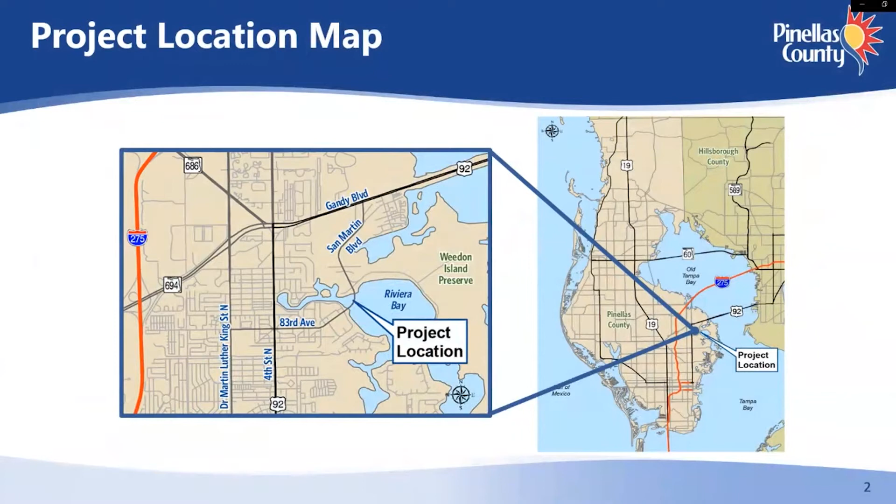The project is located in southeast Pinellas County, just south of Gandy Boulevard and east of 4th Street North. The project is located within the city of St. Petersburg, just west of Weedon Island Preserve. The purpose of this PD&E study is to evaluate alternatives for the rehabilitation or replacement of the San Martin Bridge over Riviera Bay. The project limits extend from Tallahassee Drive to Weedon Drive, a distance of 0.3 miles.

The bridge replacement is included and consistent with the 2045 Forward Pinellas Long Range Transportation Plan. This study has been conducted to meet the requirements of the Federal National Environmental Policy Act, known as NEPA, so that future phases of the project are eligible for federal funding. No build, rehabilitation, and replacement alternatives have been evaluated for the bridge and presented at public meetings held earlier in the study.

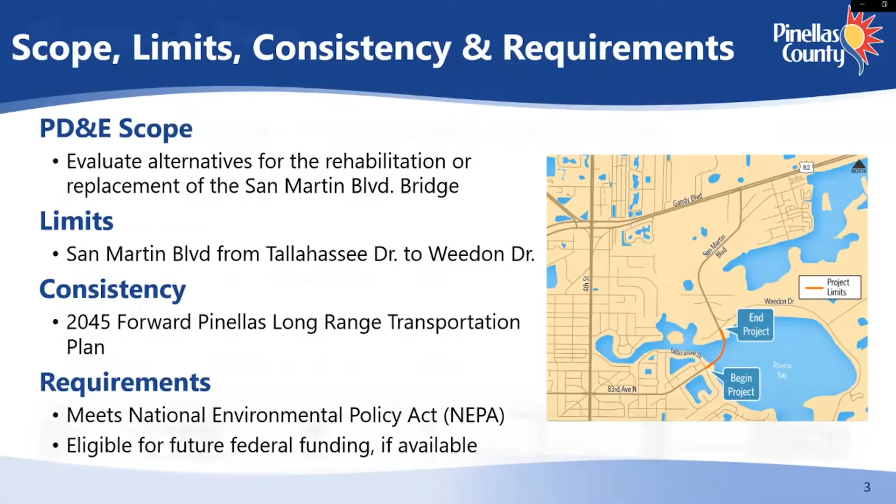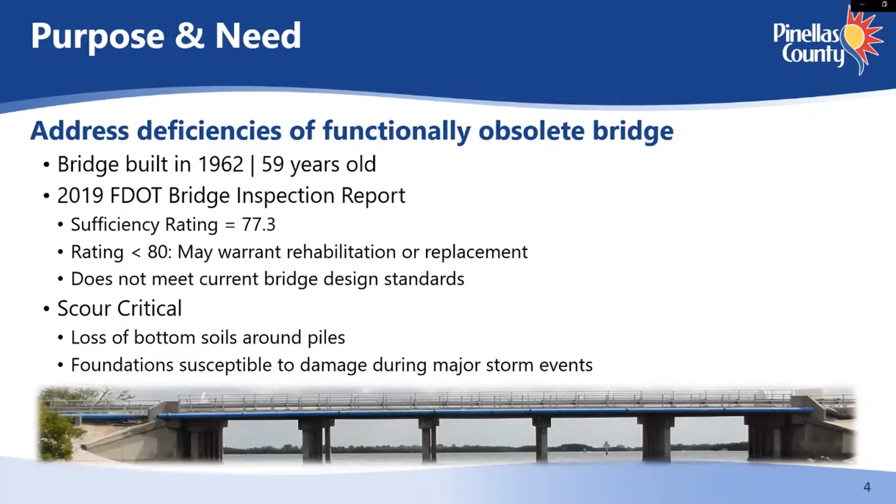The purpose of the study is to address deficiencies of the functionally obsolete bridge that was built in 1962. The 2019 FDOT Bridge Inspection Report resulted in a sufficiency rating of 77.3 on a scale of 1 to 100, with 100 meaning excellent condition. Any rating below 80 may warrant rehabilitation or replacement. A 1994 FDOT scour evaluation classified the bridge as critical and susceptible to damage during a major storm event.

San Martin Boulevard provides a link for residents in the surrounding area to access Gandy Boulevard and 4th Street North. The existing San Martin Bridge crosses Riviera Bay, an inland waterway with a direct channel to Tampa Bay. In addition to providing vehicular access to several neighborhoods from Gandy Boulevard, the bridge marks the boat access point to a series of canals that connect Riviera Bay to the 1,400-plus homes in these neighborhoods. Also, San Martin Boulevard provides a link for motorists, bicyclists, and pedestrians to access the Weedon Island Preserve, a 3,200-acre nature area located just east of the bridge.

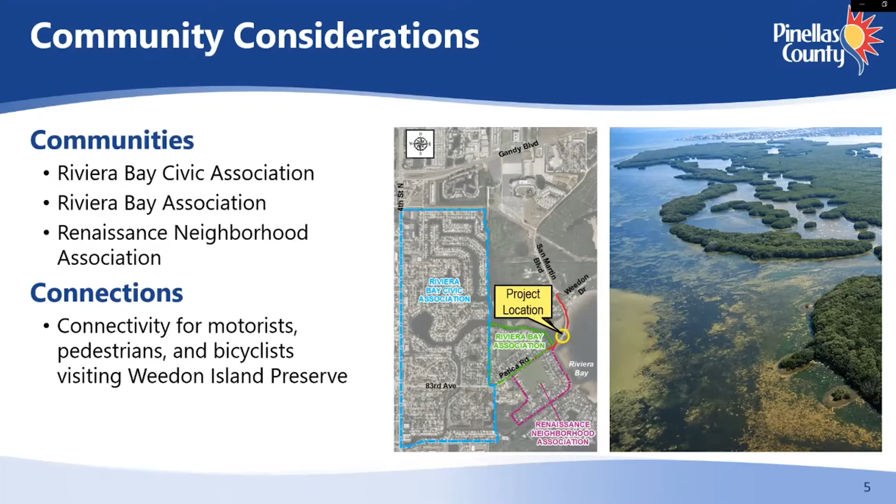The bridge is considered functionally obsolete, primarily due to its narrow width and narrow shoulders. The sidewalks do not meet the requirements of the Americans with Disabilities Act. Existing railings and guardrail along the bridge are also considered substandard. Additionally, there are no designated bike facilities along the bridge.

The existing bridge is 120 feet long and provides approximately 10.5 feet of vertical clearance above the main channel at mean high water. The horizontal clearance at the bridge is 22 feet. Since the bridge does not cross a regulated channel, the United States Coast Guard does not have predetermined clearance guidelines at this location. However, a new bridge should meet or exceed the navigational clearances of the existing bridge.

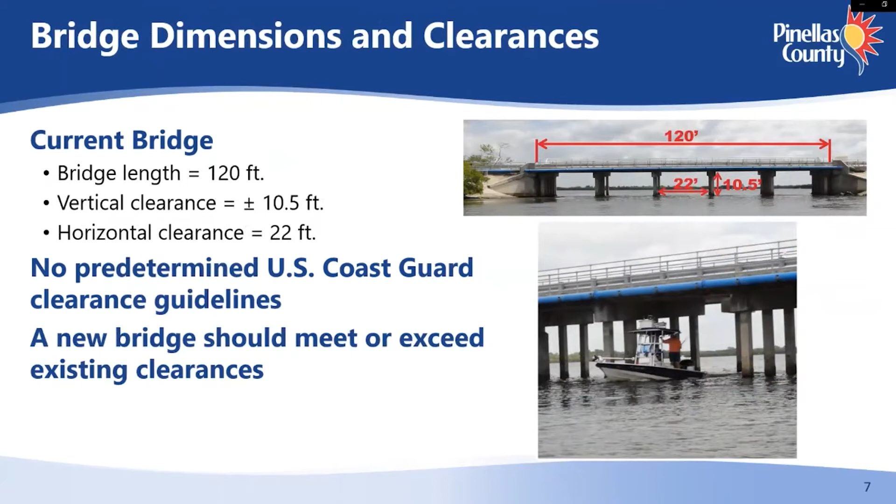During the PD&E study, several alternatives were developed that meet the purpose and need for this project. These alternatives were developed with input from the public, local government, and environmental agencies. Potential impacts, benefits, and other factors including community and agency input, economic and social impacts, engineering considerations, environmental impacts, and costs were evaluated for all alternatives. Most alternatives, including a fixed span left-shifted alignment and a fixed span center alignment, have been eliminated from further consideration.

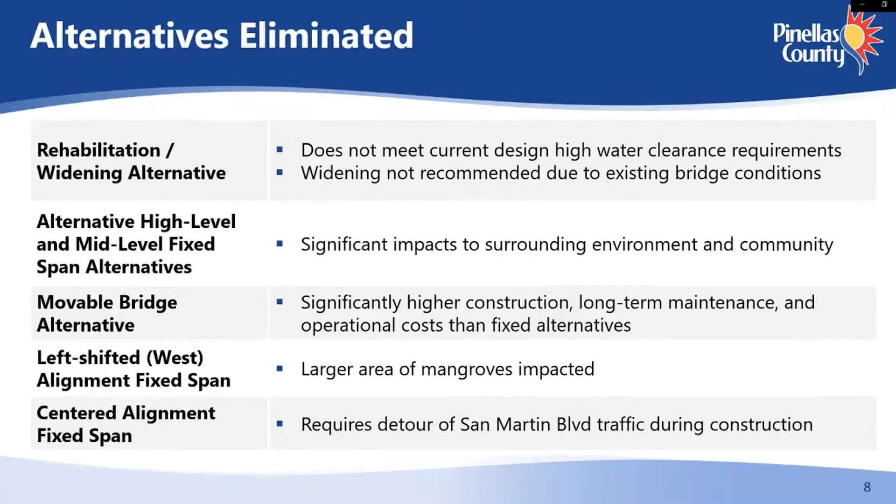The NEPA process requires that the no-build alternative is considered a viable alternative for the duration of the study. For the no-build alternative, no improvements except routine maintenance would be made to the bridge. Safety concerns would remain, and no pedestrian or bike facilities would be improved. Replacement of the bridge could be reconsidered in the future.

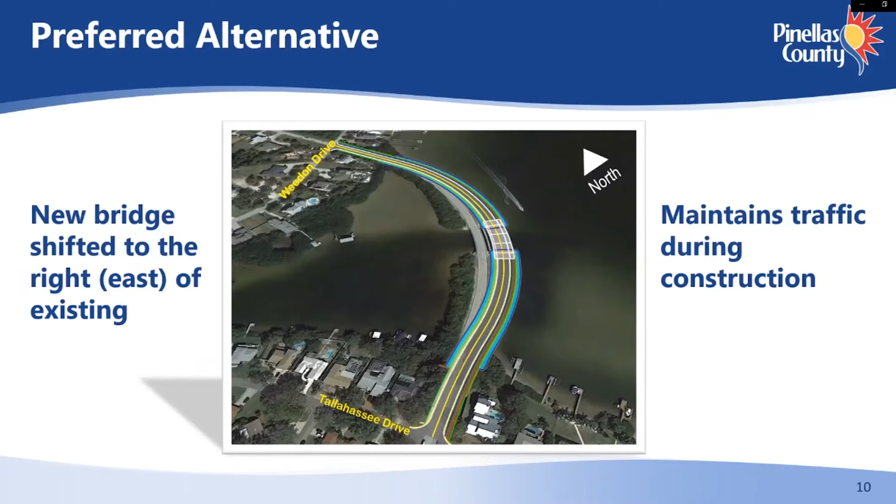Based on comparison of all alternatives evaluated during the study, replacement of the existing bridge with a new fixed span bridge located completely to the right or east of the existing bridge was selected as the preferred alternative. Phased construction of the bridge will be used to maintain traffic along San Martin Boulevard during construction.

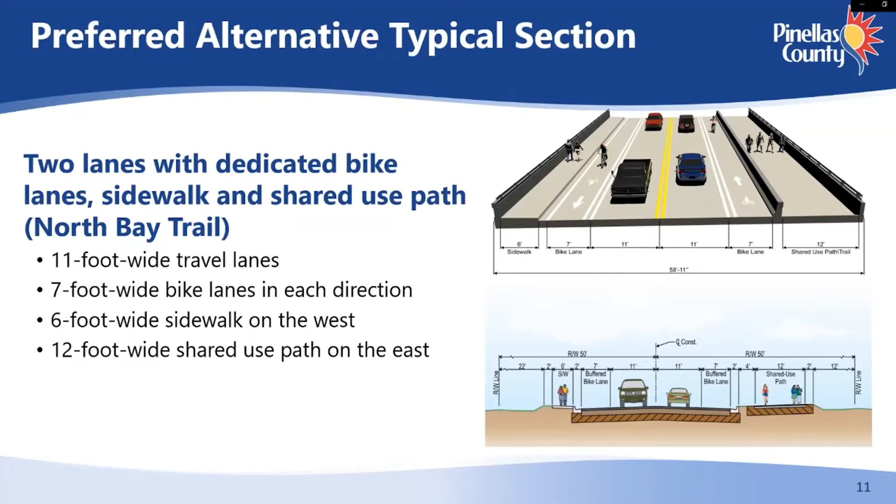The preferred alternative's conceptual typical section is a 2-lane bridge with 11-foot wide travel lanes and 7-foot wide bike lanes in each direction, a 6-foot wide sidewalk on the west side, and a 12-foot wide shared use path on the east side. A similar typical section is proposed for the roadway approaching from the north and south sides of the bridge. The shared use path is part of the North Bay Trail extension.

Potential impacts to the natural resources, cultural resources, and the social and physical environments were evaluated during the study. This study included an evaluation of impacts to drainage and stormwater. No new stormwater ponds are anticipated for the project. The preferred alternative would result in 0.02 acres of seagrass impacts and 0.6 acres of mangrove impacts. The U.S. Fish and Wildlife Service and National Marine Fisheries Service have determined that no threatened or endangered species are likely to be adversely affected by the preferred alternative.

The National Historic Preservation Act of 1966 requires an assessment of impacts to historic properties. The State Historic Preservation Officer concurred in October 2016 that there are no impacts to historic or archaeological resources in the project area. The preferred alternative will not require additional right-of-way. The existing 24-inch force main and 12-inch water main located adjacent to and on the bridge will be impacted by the proposed improvement and will be relocated. No adverse impacts from contaminated materials are anticipated. The preferred alternative will not result in any permanent noise or air quality impacts.

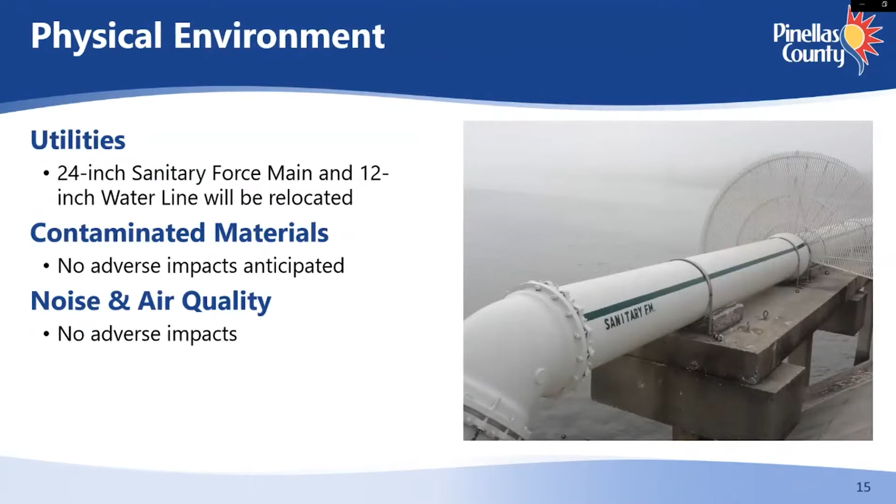The advantages of the no-build alternative include no construction costs, no temporary disruption to navigation or motorists, and no environmental impacts. However, the no-build alternative will not extend the bridge service life, address existing safety concerns, correct deficiencies on the bridge, or improve bicycle and pedestrian facilities.

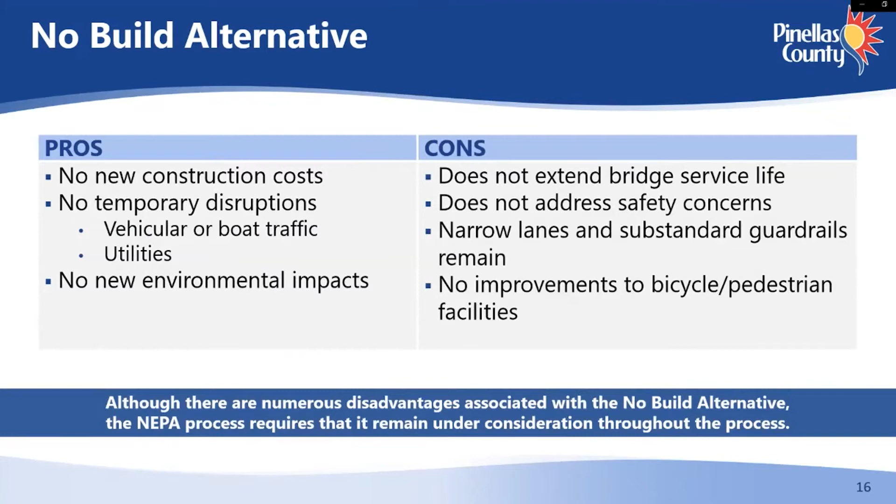The preferred alternative provides both pedestrian and bicycle facilities and improves navigation clearances while limiting impacts to the adjacent neighborhoods. However, the preferred alternative will result in additional construction costs, impacts to mangroves and seagrasses, and cause temporary impacts during construction.

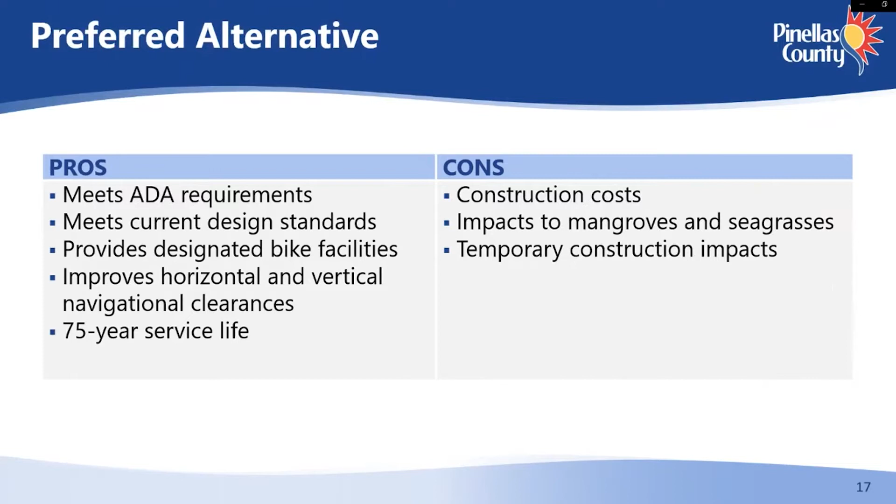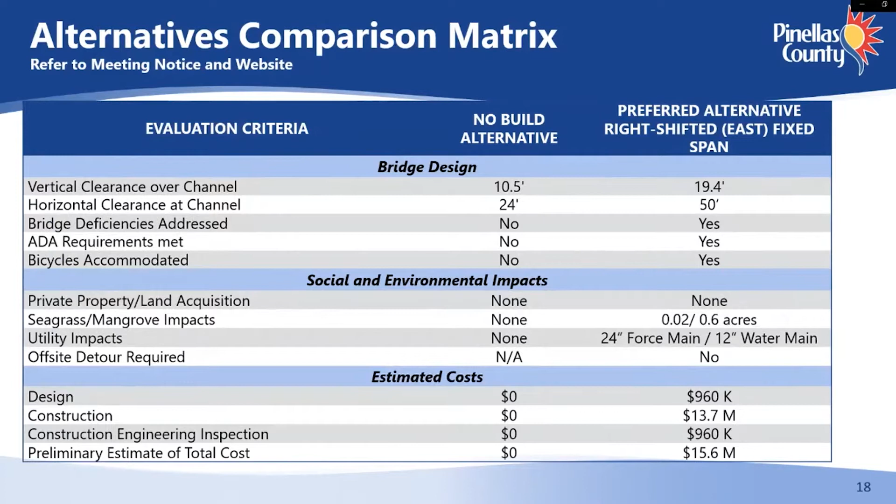The design phase for this project is estimated to cost $960,000 and construction estimated to cost $13.7 million with a service life of 75 years.

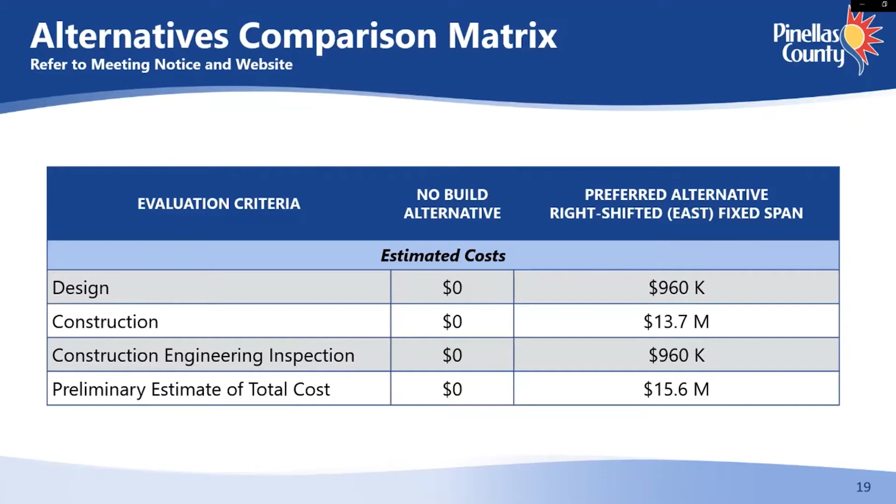This study began in 2015. In addition to tonight's public meeting, the county previously held two public meetings and has coordinated with other local officials and planning organizations over the course of the study.

Following tonight's meeting, the study team will review all public input and finalize project technical documents, which will be submitted to FDOT for review and approval. Final approval is anticipated in spring 2022.

The design phase for this project is anticipated to begin in 2022. Construction for this project is anticipated to begin in 2024. Funds for design and construction are currently programmed in the county's Capital Improvement Program.

All comments received, regardless of how they were submitted, will be reviewed and considered. If you would like to request a copy of the project documents, you may contact the county's project manager, Ann Venables, at the contact information provided.

This concludes the presentation. Thank you for your interest in this important project.

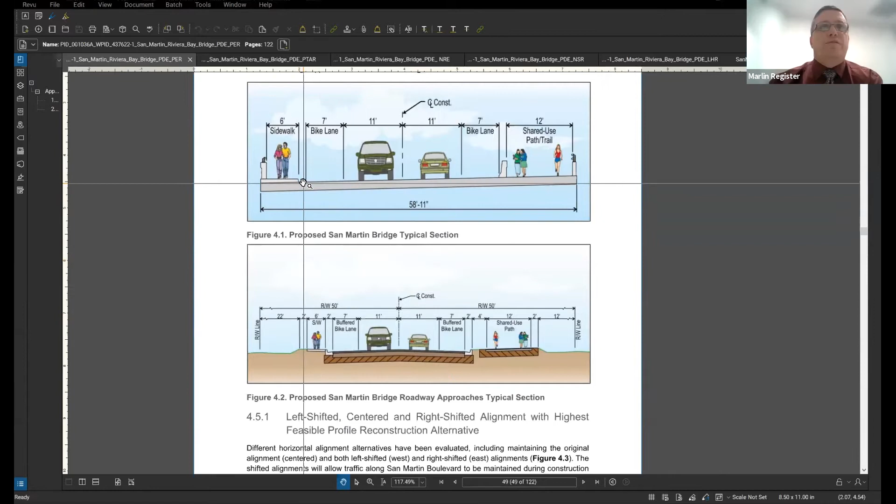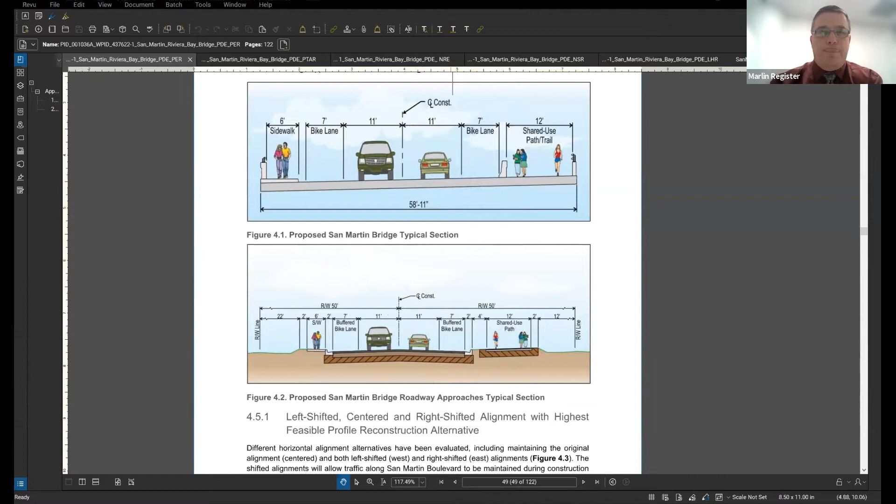The proposed typical section includes a 6-foot sidewalk on the west side, a 7-foot bike lane, 2 11-foot travel lanes, a 7-foot bike lane, and then a 12-foot shared use path on the east side of the bridge, for a total width of 58 feet 11 inches. And that's on both approaches and across the bridge in its entirety. Right.

I know the bridge is currently a fishing spot used by many. I want to make sure it's still going to be able to be used for fishing and not banned on the walking or mixed use pathways. Anne, do you have that one, or should I pass it to Marlin? I'll answer that.

We haven't made a formal determination of fishing on the bridge. That's something that has been brought up at previous meetings and will be discussed further during final design. It doesn't affect the results of our study. However, there is no provision, and there's really not enough room to provide any type of parking or anything on the bridge approaches.